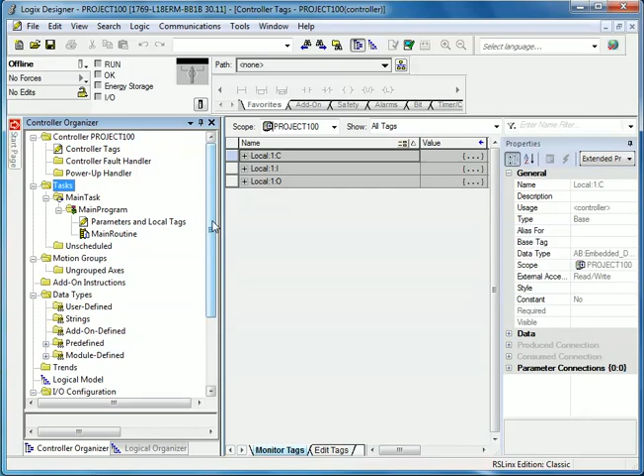Down here at the bottom, we can see that I have embedded I/O and I have no expansion modules, and this is correct. It also shows that I have an Ethernet port, which is also correct. So this is just I/O information that I'll leave alone. So let's go to the main routine. Here I've got some blank ladder logic.

It's ready to go. What I'll do is I'll create a very simple program that has one input and one output. So here's an open contact, and here's a coil. So if you hover over almost anything on this program, it will tell you what you're looking at. So this is an examine on contact.

What this means is that if the input itself turns on, this will conduct electricity. If it was a relay, that is; this is software, so what it does is it becomes true. So if this is true, the output will turn on. So I use the examine on because I have a normally open push button connected to that input.

So I'm looking at the controller and I see input 0 has a push button attached to it. And I see output 0 is a green lamp. So let's use those connections for this project. What I'll do is I'll right click and create a new tag. So the tag name will be start push button.

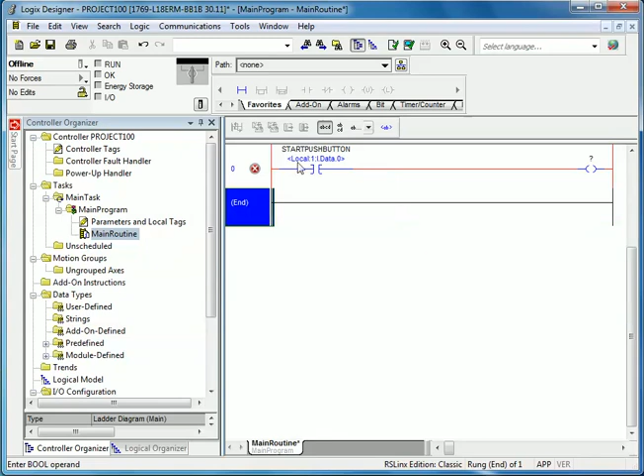Notice here it has the name of the tag and also the alias location. You can turn that off, but then it becomes a little confusing. You can't tell which are alias tags and which are base tags. So I like to leave that on. You can find that under Tools and Options, Ladder Editor Display, right here.

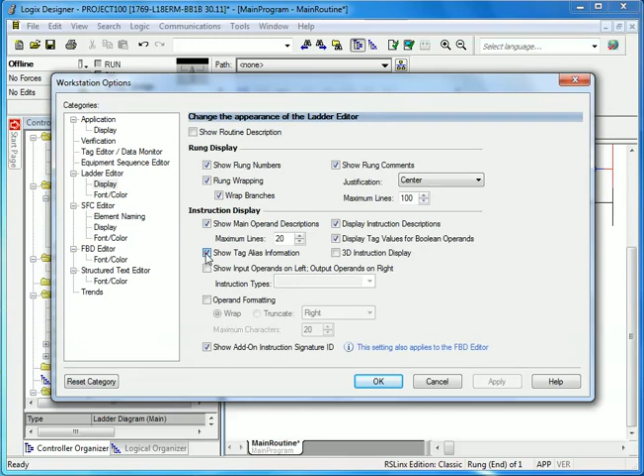So if I turn that off, you'll see that it goes away. And it's not really clear what that is. If you hover, you can see it pops up. But I just like to see it, so let's turn it back on.

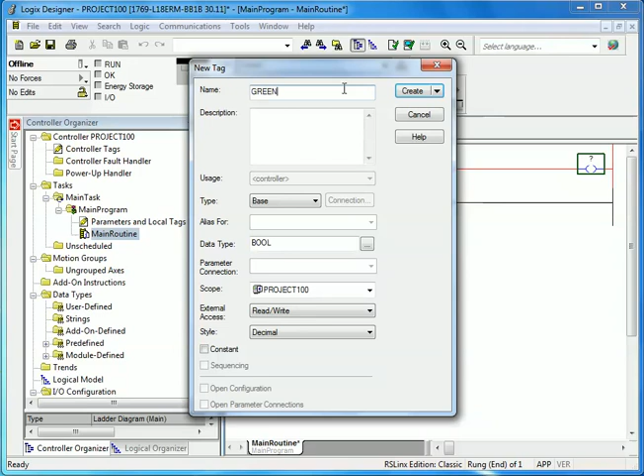Okay, so let's finish the coil. Right-click, New, green lamp. It's an alias for local output data 0. Notice that this turned blue. Blue means that it's okay. If it's red, something's wrong.

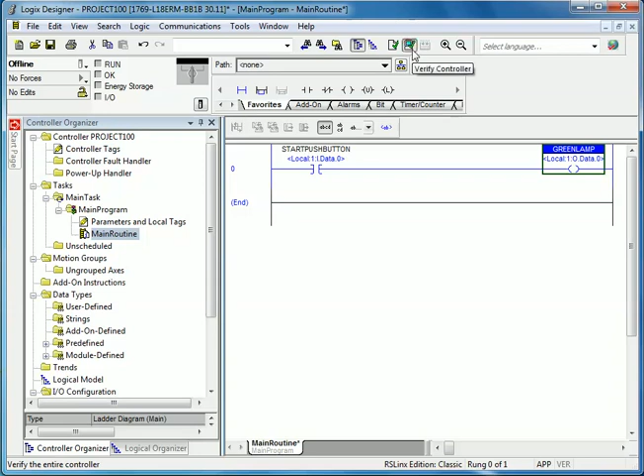So let's break it again. Let's put an examine on contact in here and not label it. Now it's broken again. So I don't like that, so I'm going to get rid of it. So this should work. If I click on this verify button, it will check it. I didn't get an error message, so it should work.

It may not work the way you want it to, but there are no major problems with it. So the program won't tell you if your program is actually going to work correctly, but it'll say that it's at least not really broken. So this looks good. Let's download this to the controller so we can try it out.

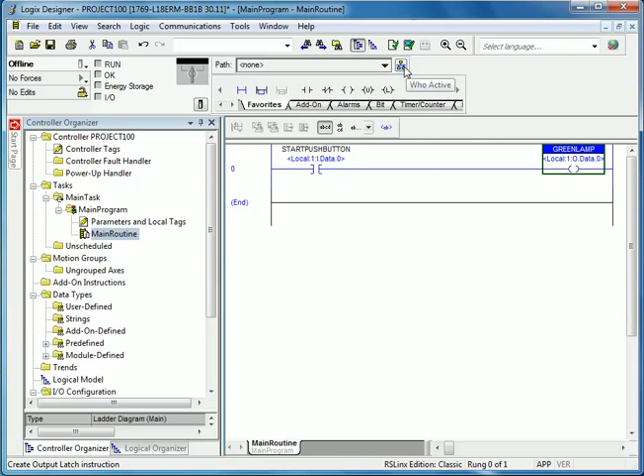So if you click on Who Active and click on a driver, and wait. It's important that we be patient here because the software is looking at the network. We have the animation, it's checking to see who's available. So we're going to go to 102, and I wait. I can download it to 102.

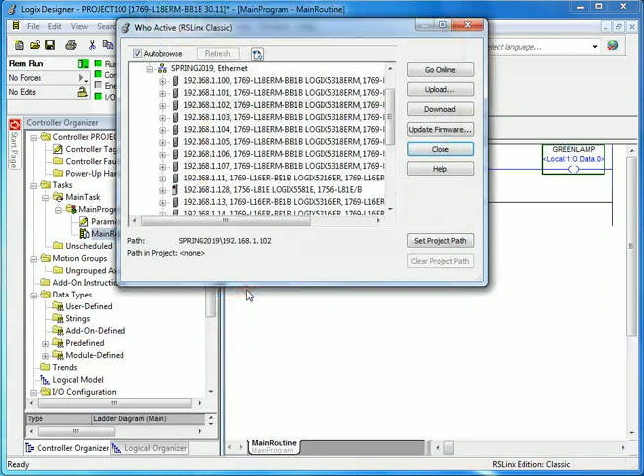It's asking, are you sure you want to do this? I say yes. Here it goes. Go back to remote run mode, yes. Now I'm online. I see these green bars here. I see that it's in run mode as well. And I see that I'm in remote run.

There is a switch on the front of the controller behind a little door. If I flip that switch to run, notice that it's now in run mode and I can't download to it anymore. So the only way to switch it out of run mode is to either switch that switch back to remote or switch it to program. If I go to program mode, the controller is not running anymore.

So it's going to depend on what you're doing. For example, if you have a large process or machine that's running, I probably don't want to go to program mode because it turns everything off. If that's okay, then that's fine, but it shuts everything down. So the safest position to be in is the remote position.

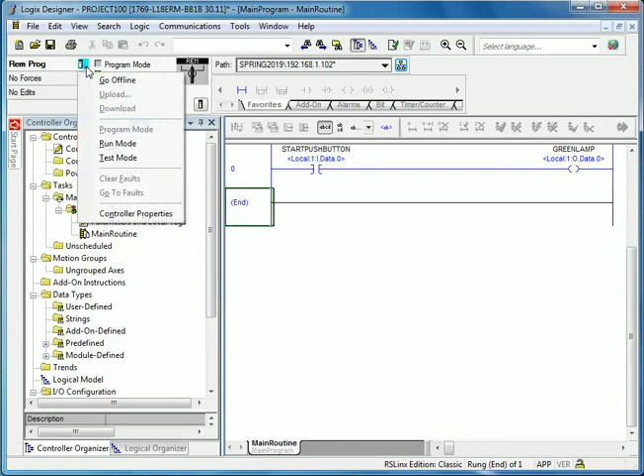So in remote, I can click and go back to run, and I can also download programs to it, and I can also make changes on the fly. So it's probably the best setting if you're making changes. If you want to lock out changes, go to run mode on the switch, and people can't make changes.

So let's try it out. I'm going to hit the green button. The push button turns green, so it's true. It is on. The green lamp is lit up. It is on as well. So if I let go of the push button, it goes off again. So there we have it, a successful first program.

Let's make a change to it. We always have to change things. So I noticed that I have a stop switch connected to input 1. And it is a normally closed push button. So let's add a start-stop control circuit with a seal in so that I press start and it stays on. What I'll do is I'll double click and go into edit mode. So I'm going to edit this rung.

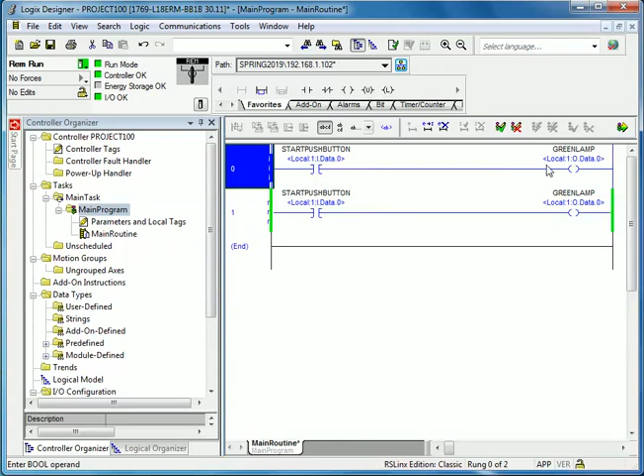I note this one is still running, so it is actually still running. The program's still working, but I'm going to make changes to it and then push those changes down to the controller on the fly. So this is the way you want to make changes if you know what you're doing, because an online change becomes live as soon as you accept those changes.

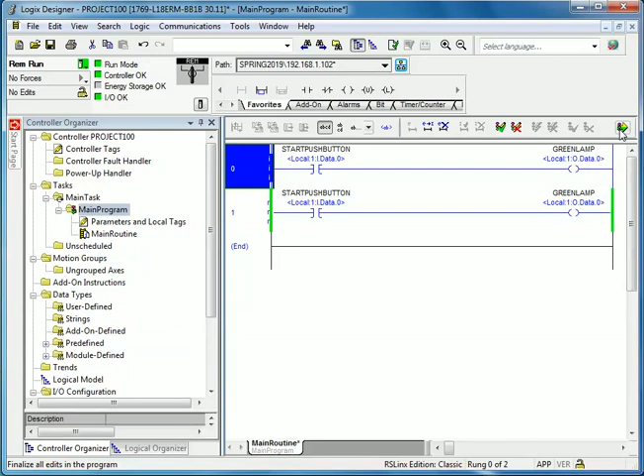So if you're not really sure, you might not want to do online changes. You may cause problems. You may break something or hurt somebody. So you just need to be careful and know what you're doing. So let's add a stop push button. Right click because it's new. Stop push button.

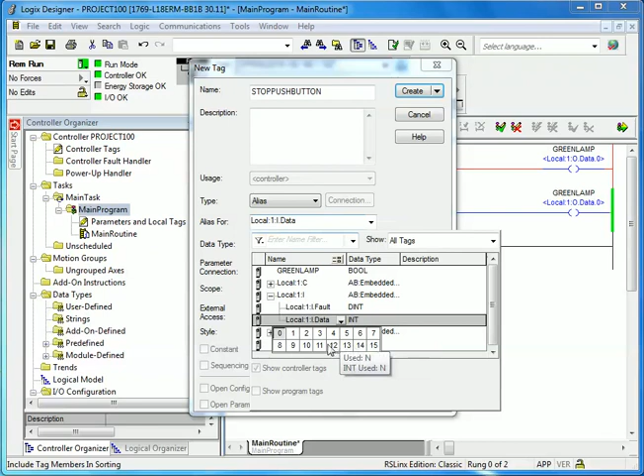It's an alias for input number 1. And notice how input 0 is grayed out. It's already been used somewhere, so it's handy. It tells me what's unused. So 1. So now I have stop and I have start. When I press stop, it's live, but it's not really fully live yet because I haven't accepted the changes.

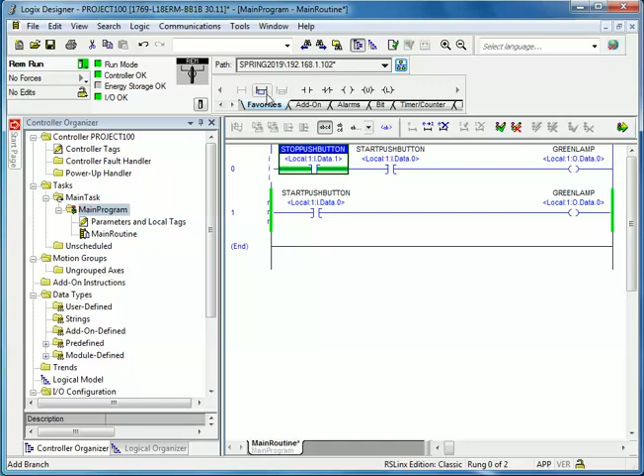So let's go ahead and add a branch around the start push button. So a branch is a path around a component. I would like to put the green lamp in that branch. So I'll pull down the name green lamp, not the alias name, but the name itself. So now I have a stop button, a start button, a lamp and a seal in around the start push button.

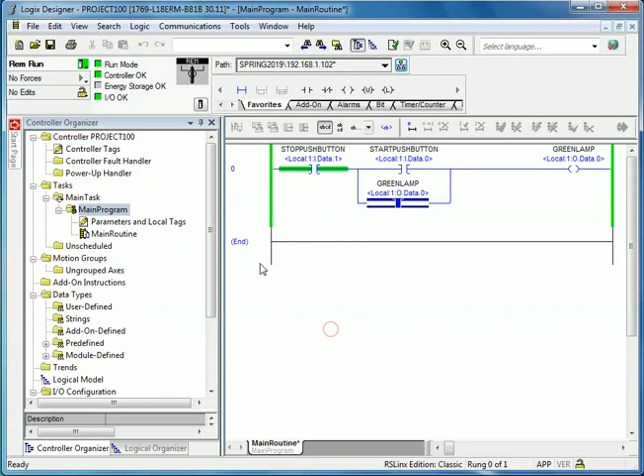So let's accept those changes. And it says, are you sure you want to do this? Yes. So what I have now is a start seal in circuit. If I press stop, it turns off, start, stop. It works fine.

Now I have a normally closed stop push button. So you might be wondering, why don't I use the closed symbol here? It's because the push button is already on, so I have to use the examine on contact. Well, let's change it and see what happens. I can double click on the symbol, change it to the off type.

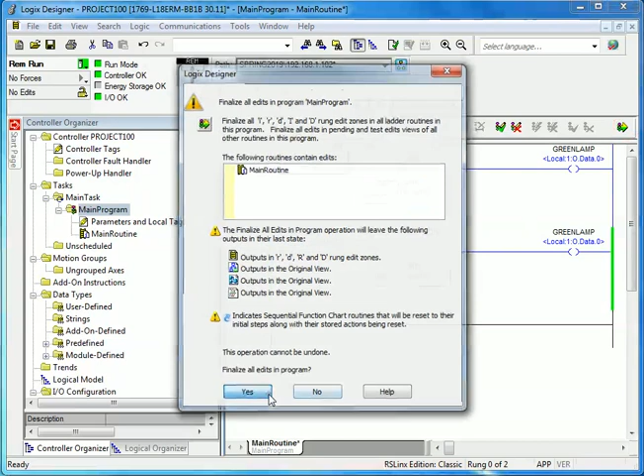So it looks like it might work. It's a closed switch, right? So accept those changes, press start, and nothing happens. Because the stop button is already on, and this is the off symbol. So if I press the stop and hold it, now it works, but that's not the way it's supposed to work. So let's fix it.

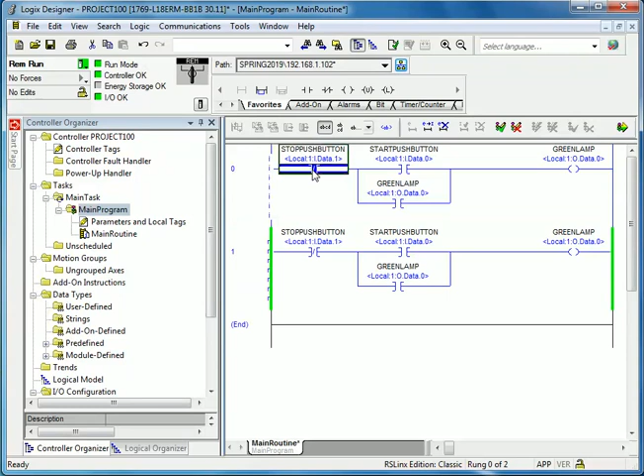Let's go back to the way it was. So double click, and accept. Start, stop. So there we go. It's actually very simple. It's very repetitive. Once you have done one or two lines of instructions, you'll see what I mean.

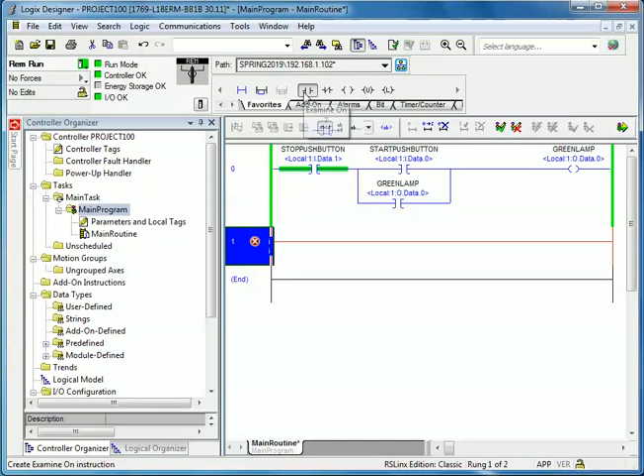So let's add something to it. This is the new rung instruction. Let's use one of these old tags instead of creating a new tag. So let's pull down an open contact. Let's bring down the push button name. Let's create a coil that doesn't go anywhere. It's not an external connection.

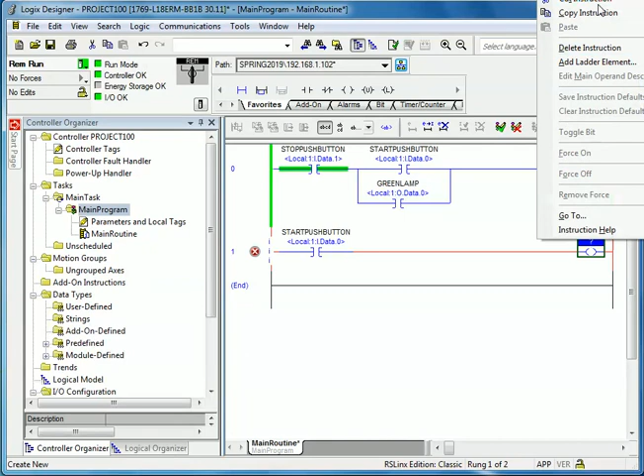So let's do a right click and make a new tag. We'll call this temp, and it's a base tag. So that's just an internal tag. Let's accept those changes. And you can see temp turns on, but it doesn't do anything outside the program.

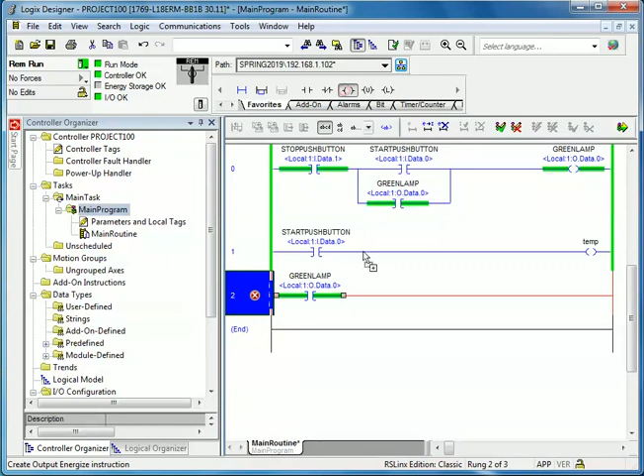So let's create another line that uses something that we've already created, like green lamp. So it's not a new tag, so if I double left click here, I can select from available tags that I've already created. So let's use green lamp as an input, and let's go to a coil called, right click, new tag, green lamp works. And let's accept those changes.

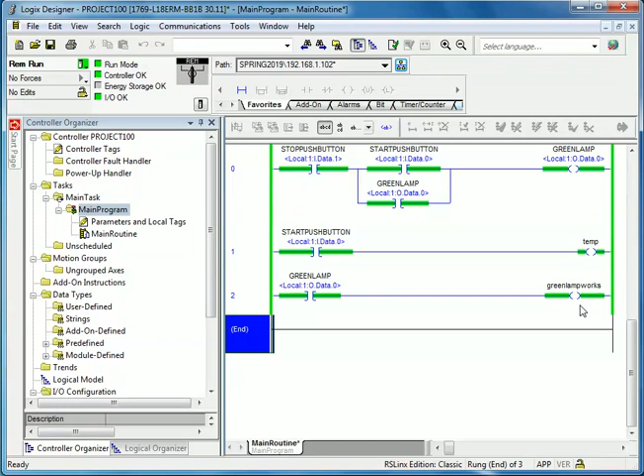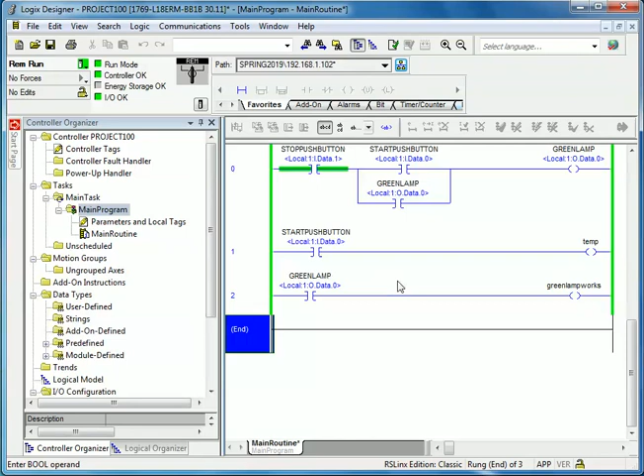So now if the green lamp is on, green lamp works is also on. If I press the start button, temp is on because it shows that this start button is on. So I'm just adding more functionality to the program. It's actually fairly simple. Once you get past the mechanics of pulling down contacts and coils, it becomes a question of where are the instructions? How can I find what I need?

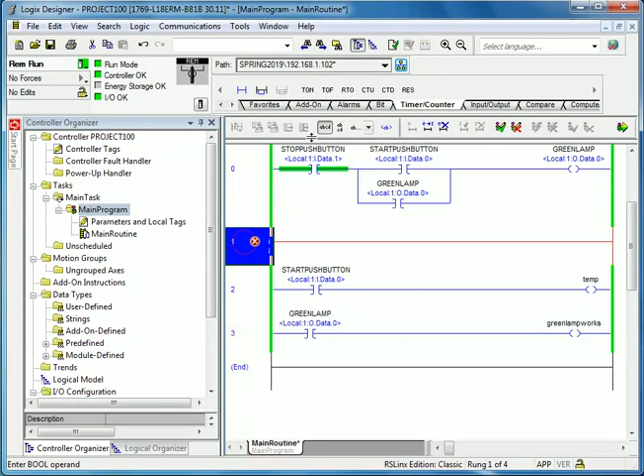So for example, let's add a timer that times for 10 seconds after the green lamp turns on. So let's put it right here, right in between these. We'll do a new rung. We'll pull down an on timer, and we'll pull down a contact. Notice the favorites tab. The favorites tab gives you quick access to the things you do most often. So let's pull down a contact, and let's bring the green lamp down. So I'm going to have a timer that runs for 10 seconds and then turns on.

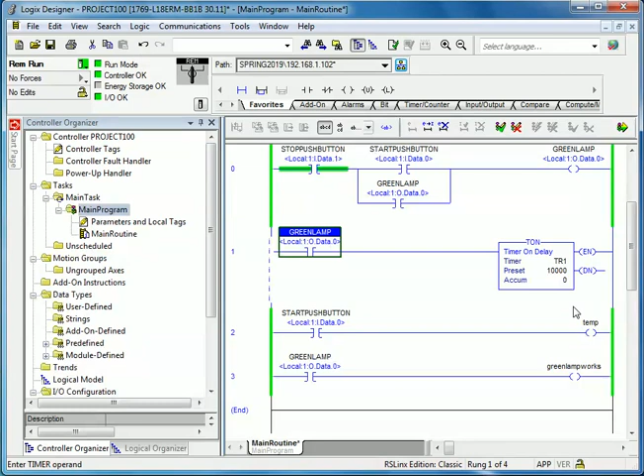So I'll right click, new tag. This is going to be time relay 1. It's always a base tag. My preset time is in milliseconds, so 10,000 milliseconds is 10 seconds. And while we're here, let's connect this to a coil called times up. The way I'll do that is bring down a branch, and I'll bring down a contact, and it's out of TR1, so I'm going to type TR1 dot.

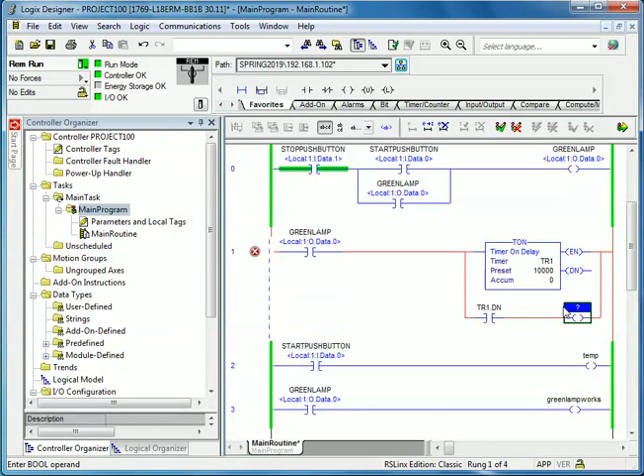TR1 has several bits that I can work with. The done bit is the one I want. When the timer's done, this turns on. So let's put a coil after the done bit, and it's called, right-click, new tag, times up. Okay? And let's accept those changes.

So let's make the green light turn on. The timer is running. 4, 5, 6, 7, 8, 9, 10 seconds. Time's up. Notice the timer stops at 10 seconds. It's done, so time's up. If I press the stop button, my timer clears out to 0. There is a retentive timer that doesn't clear out to 0.

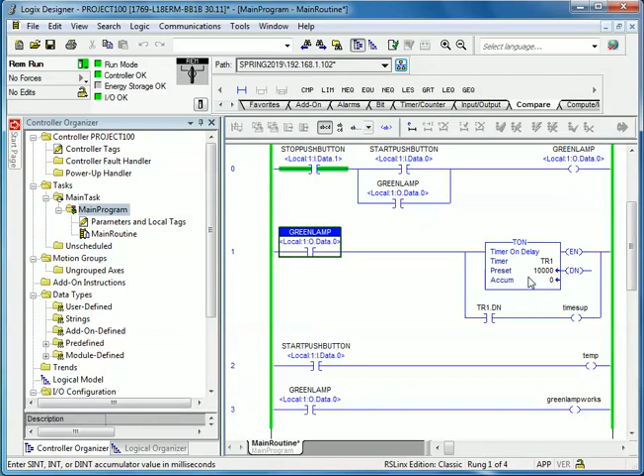So whatever you need, you can probably find it on these tabs up here, or you can make almost anything work. Just for fun, since we're here, let's add a compare function. Now, I would like to know when the time delay has gone longer than 3 seconds. That's a greater than. So let's click here, add a new line. I'll pull down a greater than instruction, and I'll pull down a coil as well.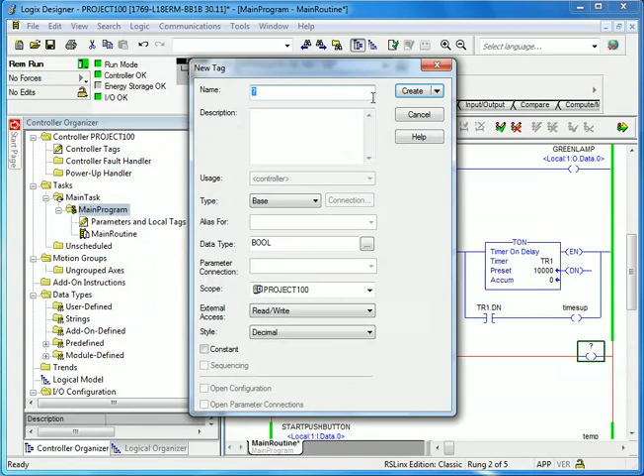So source A is going to be the accumulator out of TR1. So I'll type TR1 dot ACC. Source B, 3 seconds is 3,000 milliseconds. So if this is more than 3 seconds, this will turn on. So right click, new tag, over 3,000. And accept those changes.

So let's run it. Turns on, over 3,000. And time's up. So whatever you need, you can probably make it work.

The way to be successful in this environment is to put it on paper first, come up with a rough plan of what you want, and then be sure of what you want. The worst thing is to make changes after the fact because of a misunderstanding or maybe your goals change. It just takes time to do that. But be clear on what your program should do at first, and then just make the basic functionality work correctly and add things to it.